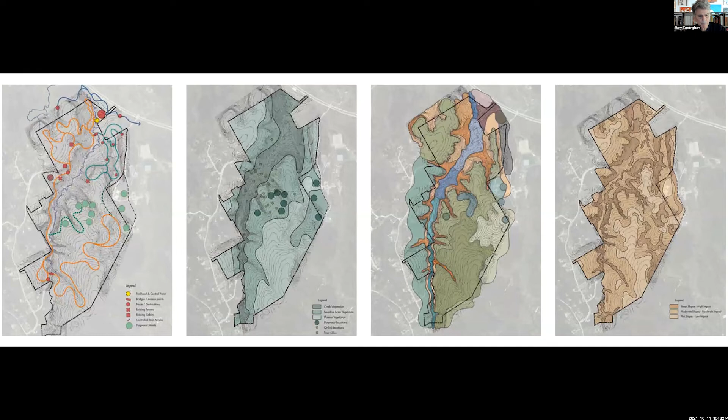Spending time on the site and learning about that was quite wonderful. And the site we had ourselves had its own interesting challenges going on. It was a brownfield, an existing satellite dish installation for AT&T with this massive dish in it.

And we had to go about basically cleaning this thing up. The idea was to put the building on this already disturbed brownfield and not impact the 400 acres of this rather sacred environment. So we proceeded to design a building, and of course, like a lot of projects, it was a very challenging budget.

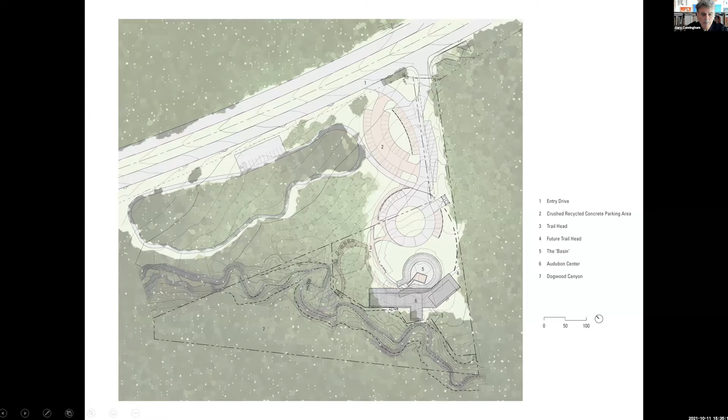And you notice that the building has a very bright white roof, and this is to reflect heat. Because the roof is gently sloped away from the view to the north, nobody can tell it's a white roof unless you're in the air—and of course, the birds that fly around. But this building is a gold LEED building, and so we are also trying to teach the idea of conservation, respect, and sustainability, which is so critical.

Now, what's interesting about the siting of this building is you've got the circle here, which is this dish where the satellite dish sat. And here to the south of the building you have this creek, which floods quite a bit. Here's the building sandwiched in between.

We could not do a traditional foundation where you plant the building into the dirt, because water needs to flow under the building to get to the creek, since the area to the north of the building is higher than the building. So it's going to flow south, under the building, into the creek.

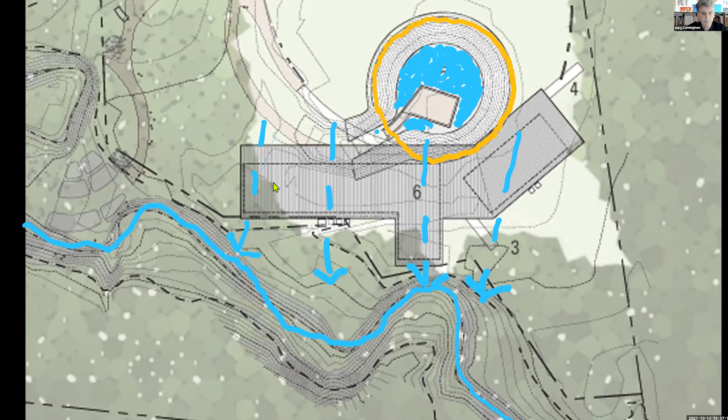In fact, we studied making this a permanent water feature, but our client, Annie Brown, director of Audubon Texas, said, 'How do you intend to keep water in this feature?' Well, we said we'd maybe put a well in, or a windmill or something like that, to pump water into it.

Audubon's attitude is that they do not like drilling holes into the earth, because it's not a cool thing to do, and the amount of evaporation you have when you have an open area of water like this is devastating.

It'll evaporate in a matter of days. So if we were pumping water out, utilizing resources, taking groundwater out of the earth, we would have been doing a disservice to the land and to the site. We were instructed to use it as a teaching tool, not to go with our instinct to make it a beautiful water feature, but to let it be what it is and teach that to visitors.

The way we kept the water flowing underneath the building is we literally lifted the building up off the ground and propped it up. We drilled some piers and used simple steel bar joists to jack the building up. This is the expression of how the building operates with the land. We respect the land, we're light on the land. We did not engage it with the exception of these 18-inch round pier holes.

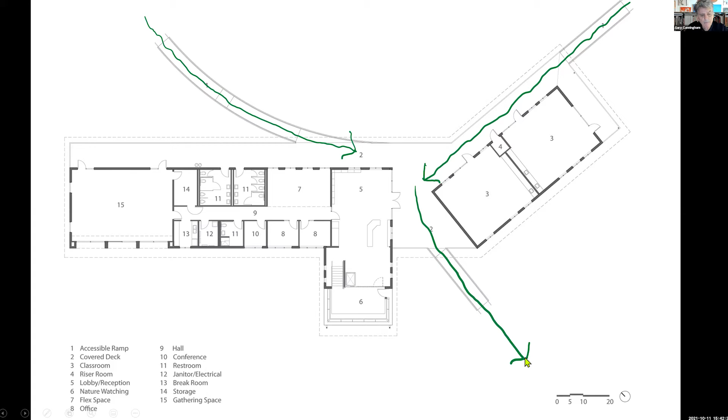The important thing is these roof areas that cantilever past the buildings, and this porch that's formed in between the 2 buildings that really form a portal from the gathering area in front of the building to the north to the actual path to the Dogwood, to the canyon itself.

It's slanted to try to keep the birds from flying into the glass and killing themselves. When you put a window in a forest, it basically makes a mirror. So when a bird takes off and sees that glass, they may see a reflection of a sky. And so they think they're flying into the sky, and they'll slam into that glass and wipe out.

That is not a very positive signal in a nature center to have dead birds sitting around the building. And you'll see later in the last project that there's a new way to do bird safe glass, and we're figuring this stuff out, and so are the people that make glass, and it's becoming an easier way to protect wildlife, because we lose a lot of birds to glass, and it's often downplayed, but something that, again, every little bit really matters.

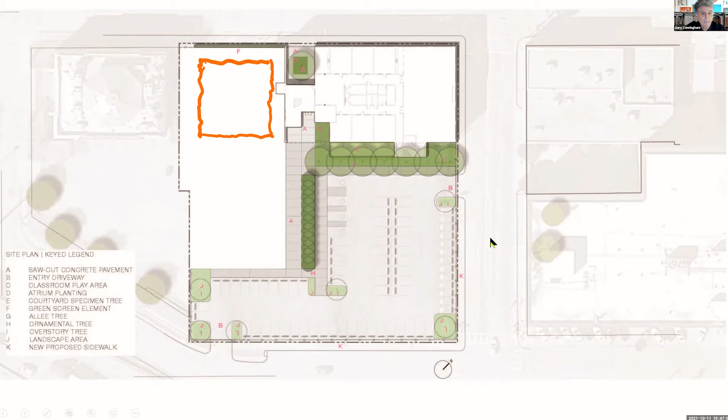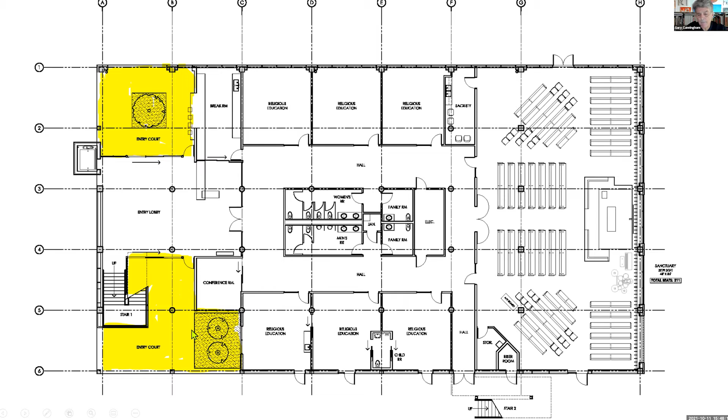And the cool thing is that we had more building than we needed. So in lieu of just simply building out more space, we decided to remove occupiable space and make it exterior space, because we had no porches, we had no outdoor space besides the hot street and the parking lot. So the yellow here indicates areas on the first level where we basically just removed the exterior skin and made it exterior space. And the second level, likewise, a courtyard, an upstairs courtyard, and an upstairs courtyard here. So this kind of became the primary move to introduce nature and light and gathering space for the congregation, which obviously is very critical now.

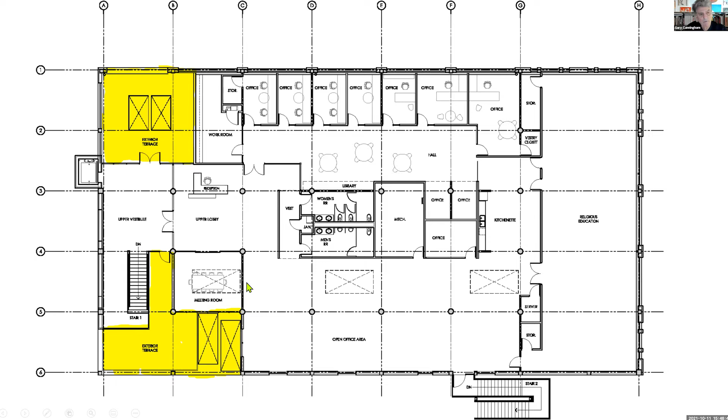And in fact, this project just finished as COVID kicked in, and they began occupying the building probably about 3 or 4 months ago. So they're loving it, they're enjoying it, and they're finding themselves utilizing the outdoor space to greet people and hang out and do stuff.

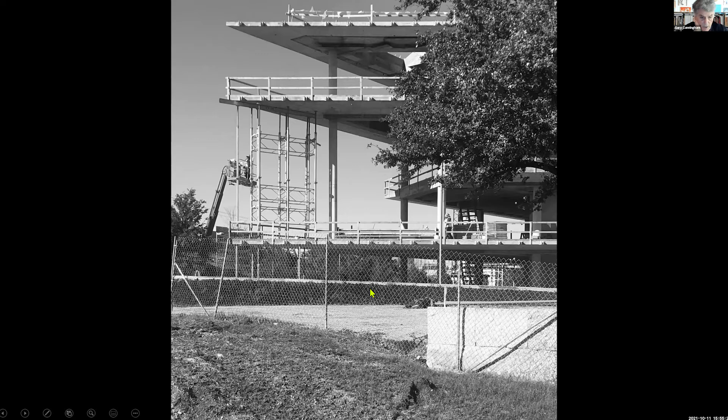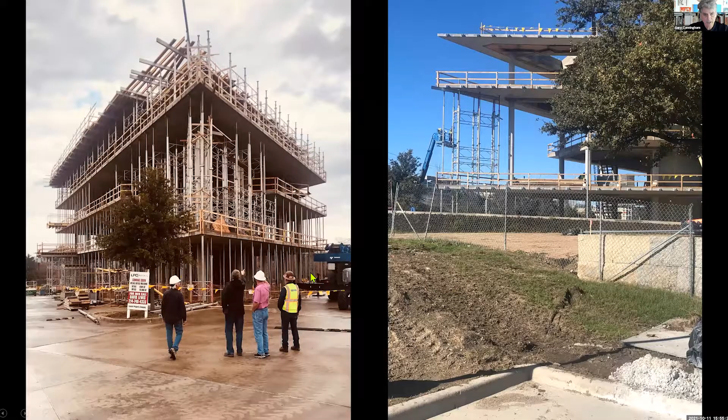This last project is kind of in the suburbs. So we've gone from rural to the edge of an urban condition, to a suburb that's actually trying to introduce an urban condition, with this funky office building and retail site for our client, Half Price Books. They've been our client since the mid 1990s. They're basically a bunch of hippies that go about doing things in a very interesting way, and we just really get along. They're pretty nutty people, but I love them.

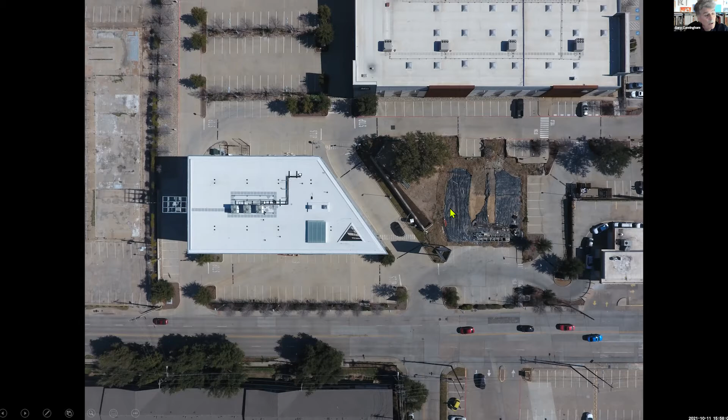The building started construction almost 9 or 10 months before COVID hit. When COVID kicked in, we had to shut it down because Half Price had to save every penny for salaries and payroll. So we shut the job down, and Half Price managed to pay all of its employees, not lay anyone off during that period. They stayed healthy, so we kicked the project back in — it'll be a year next month. It's been a very, very difficult reboot, with a lot of challenges with subcontractors. I think we're on our 5th steel erector right now. So we're going to get there, but it's challenging.

What makes this building rather interesting, and I think very relevant to today's talk, comes from our client, Boots — that's her nickname, her name is Sharon. She kept talking about wanting to do a roof garden with trees, and we'd say, Boots, we can't afford to put trees and a roof garden on this building because we'd have to add an elevator stop, stairways, and support all that weight of landscape up there. It's just not in the cards for the budget. But she kept pushing us on this and repeating herself.

We finally got the message, and realized we could design a building that is basically an area of enclosed, purposeful space — in this case three levels of office or retail above first-level retail — but put the stairways, one stair, a second stair, and the elevators outside, making the lobby of this building an exterior lobby. Don't enclose it, don't air condition it, and give us some outdoor space to hang out and mill around. That's what we did. Again, Boots kept telling us she wanted to be able to be outside, to have events and have people hang out up there.

And of course it was a smart move economically because we're not air conditioning all that space, but it really became a fun project to take this idea and join the two sites, where when you're on the 2nd, 3rd, or 4th level, you're looking back to the south to the restaurant roof and this outdoor garden that's really formed by this amazing live oak tree that we saved and kept.

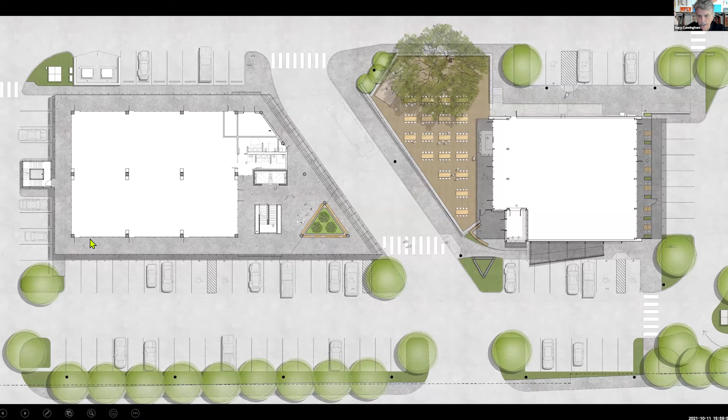You can see the gray outside space — it wraps around the floor plate. Looking at the 4th floor, this is the enclosed office space, and this is a 10-foot wide walk-around. So you may take an elevator up to the fourth floor and walk around to find the front door of the office you're visiting outside around the corner, or you may enter here and go internally. You may walk back around and go to the bathroom, into a vestibule, or you may come up for an event and have a glass of wine and sit outside the whole time.

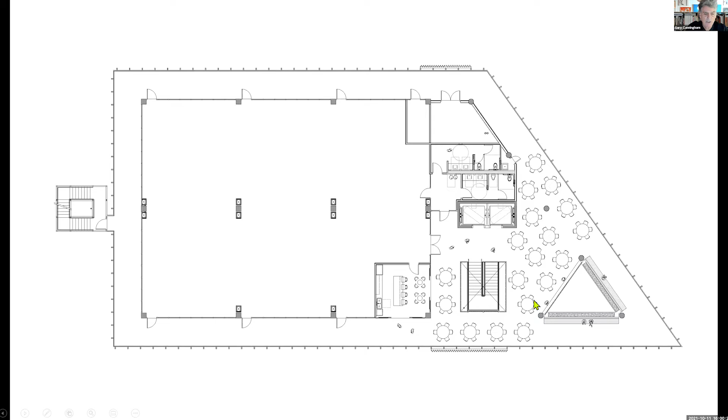There's benches right here. We're going to plant some trees on the second floor in a large planter well, but we see this outdoor space being used a lot.

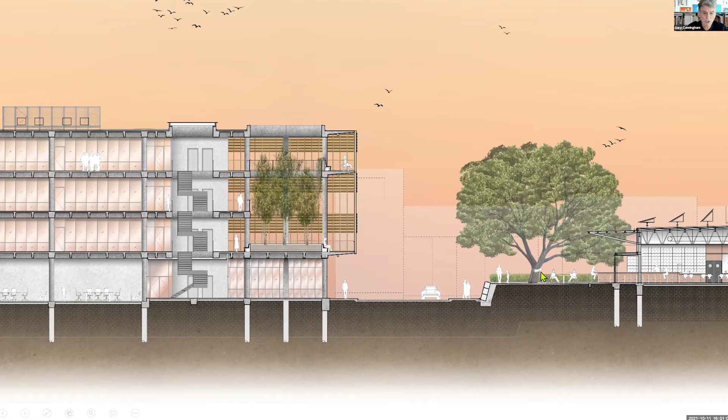And here we are looking into the beer garden of the restaurant, with this large, beautiful tree. Even the way this roof is being designed for the restaurant, we thought about the view of it from the office building looking down. So we've got basically snow fencing up there to block the air conditioning units and give some interesting action going on the roof of this restaurant.

This is an outdoor dining space. In fact, there's been several restaurants that wanted to rent the space and offered to take it, but they wanted to enclose this out here. We just told our client, nope, don't do that. And they listened to us and said, no, we're not going to enclose that, we're not going to increase the square footage. The outdoor space is important as a breathing space between the restaurant and the office building. So we're now working with someone that wants to keep this outdoor space the way it is, keep it intact, and keep that break area between the building and the restaurant.

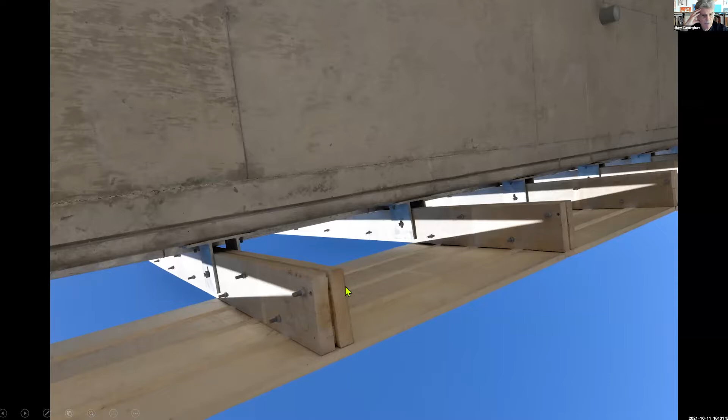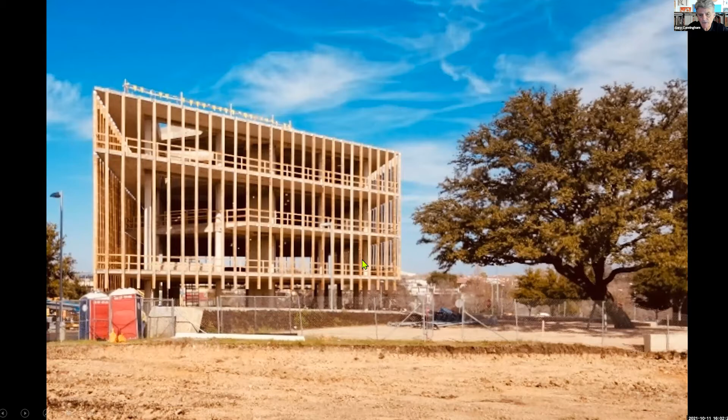This building is very interesting. It's basically this concrete box, stacked plates, that we bolted stainless steel anchors onto, and we basically bolted 2x8s, sometimes with steel in between, to them, building this kind of veil around the building. You can see the stacks of the floor plates, and then these sticks of wood going up and down, literally guys up there with drills, in a lift, screwing this wood onto the 2x8s.

The wood hasn't been planed or finished. It's raw and kind of fuzzy. Those stripes you see came from the banding during the process of acetylation, when they put it into a kiln and vacuum out and inject vinegar to take all the edible meat out of the wood itself.

But the technology is guys with drills. We can take the stuff down and move it around. This building may morph over the next 20 years into who knows what. It may end up being a ghetto with floor levels of stuff hanging on. That's fine with me.

This is the wood several years later, and you can see some of the strap marks, and it's got a nice rough texture to it. We saved money by buying this wood and not having it planed. Often when you buy wood, you've got to surface it on 1, 2, 3, or 4 sides. This wood is a full 1 1/8 inch thick by 8 1/8 wide. It would have been milled down to 7.5 by 3/4. We've got an extra 3/8 thickness and almost an extra inch of size, plus this nice rough surface from the sawmill back in the forest.

So again, this is focused on budget. To finish the wood would have cost more money than we could have afforded. Frankly, the gnarliness of this wood really lends itself to the building and the attitude and approach we took to skinning and shading the building from the sun.

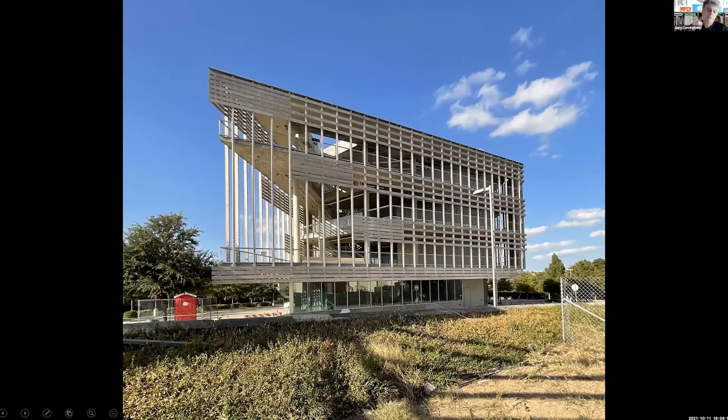So you've got this stacked box, and you've got 4 sides of elevation, and the elevations reflect the solar orientation of the building. This is the south wall, south elevation, and you can see reasonable shading on it—very little sun reaching the building beyond at this time of day. Although at the corner we break away to bring in a lot of light where a tree is going to get planted right here.

The west side turns the corner, and you can see it's dense right there. As you move around from the south to the east, you can see the east has no horizontal slats at all—well, we couldn't afford them, and the wood's pretty expensive.

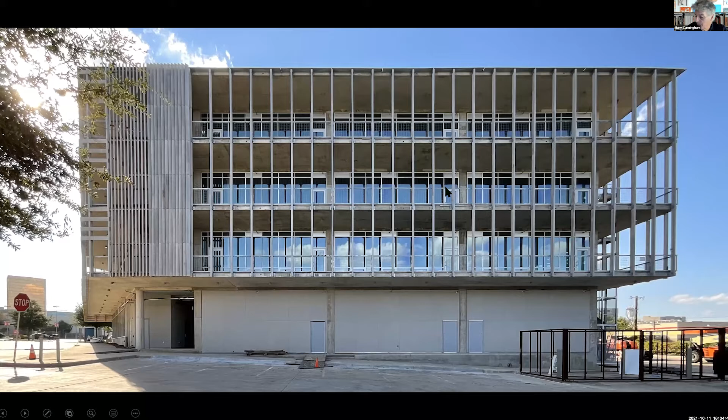So we researched this—recall a few minutes ago I talked about sloped glass in the Dogwood Center to keep birds from flying into windows. Well here, the glazing on the east and north is glass with white lines etched in it every 4 inches. The birds see those lines and won't fly into it, because you can see the beautiful cloud reflected right there. If a bird is sitting on this rail, it would want to fly into that window to get out, and we would probably kill it.

So again, the cost of this glass was less expensive than the wood slat screen. We wanted the wood screen, but this was the right move because it's what we could afford. You let the budget drive you—you have to at times, and you've got to be flexible and open-minded. The purpose here was not to kill birds and keep the project on budget, but also to show that the building has 4 sides with 4 different responses to the climate, trying to coexist with nature that's around us.

This is the north elevation. You can see the same glazing happening over here. This is one of the stair towers, finally getting clad in expanded metal lath. Again, both stairways are exterior to save money.

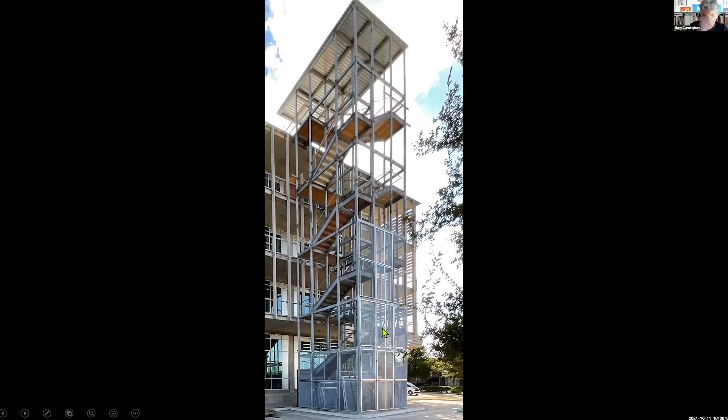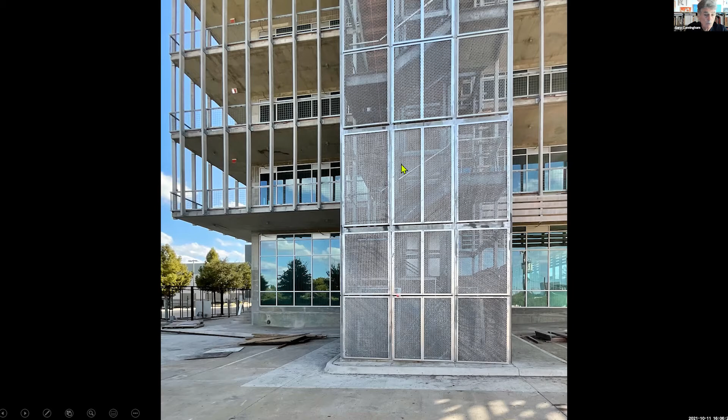This one goes to the roof for maintenance. This is very cost-effective—expanded metal lath welded to simple metal angle frames, then either zinc dipped or hot dip galvanized. All the metal on the job is galvanized. The idea is not to have to paint it; if we do paint it, we'll start with galvanized paint down the road. The idea is to have no maintenance, and we also like the color palette it gives the building.

Turning the corner from north to west, you can see how dense the shading becomes. The lowest element turns the corner because that's a sign band where people put signage for the retail center. The west has, without a doubt, the most shading—very little sun gets in there. This increased vertical shading is at the elevator lobbies, a more unique situation, and the screen cuts back at the corner to let in light for the trees that are going to get planted right there.

This is the walkway on the west. There's a glass storefront of the office building, and that's the west sun. Right now it's probably about 1:30, 2 o'clock, and the sun is well protected. Come 5, 6, you'll start getting some light filtered in, but by then the offices are pretty much shut down.

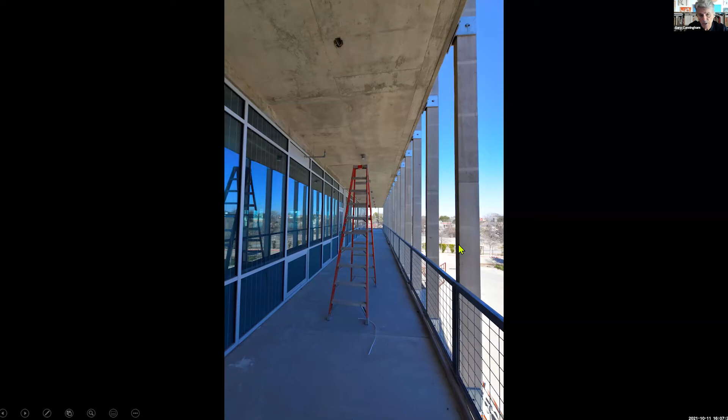The northeast side, you can see this is in the afternoon as well. No sun's reaching it, and by the time it turns a corner to the south, this thing's pretty much in shade. But the idea is you're walking around outside to get to your space, promoting people getting outside and getting some fresh air.

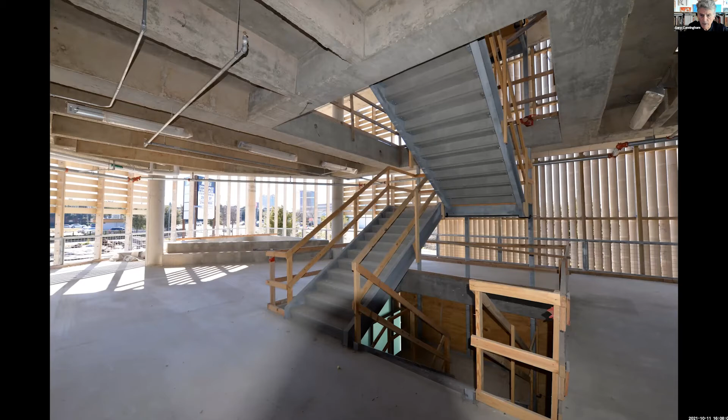Here we are at the stairwell, looking back to the southwest, and that's the planter that's going to receive about 5 river birch trees, and that's a bench right there. You can see fire protection sprinklers, heaters, lights.

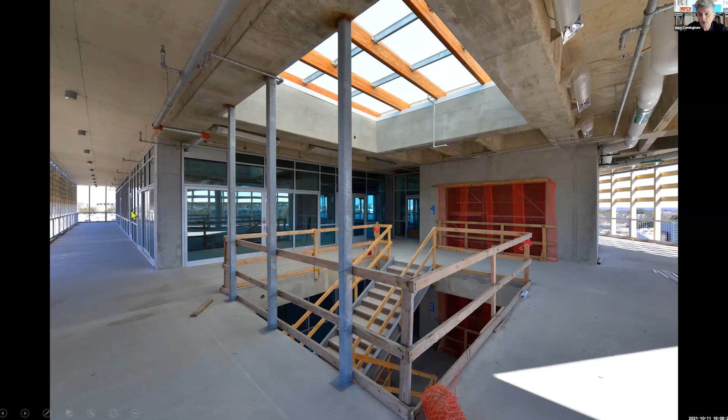This is a functioning lobby for year-round use. There's the elevator doors on the outside, there's the office right there. Again, exterior sprinklers. That's the walkway on the west side. And there's the entrance to the bathrooms, vestibule.

Looking back to the corner, there's the west, that's the south. See the sun filtering in here, but it really doesn't quite reach the wall, does it? A really fun corner. Interesting view.

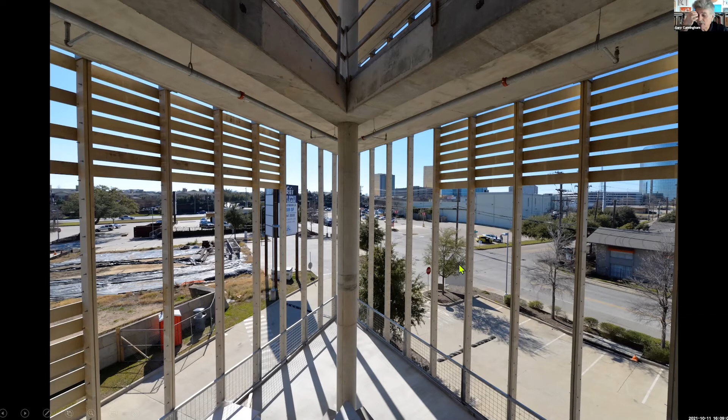When you do a project like this, and this was not a very big project, I'd say it's about $10 million, we had to engage a concrete subcontractor to do the concrete frame. It's hard to find a small concrete subcontractor that does this sort of thing, so we had to go with a big guy. They are so busy and so big that they really didn't want to talk to us.

They said, we're just going to do it, you get what you get. We asked, what kind of forms do we get? Well, you're going to get caliber grade D forms. Grade D means it's probably 30, 40 years old sheet metal. It's going to be beat up, going to have lots of challenges and problems. You look at some of these pans and they're just beat to heck. But that's what the budget could afford.

So we had to embrace this approach and accept that as kind of a rough aesthetic. It certainly ties nicely into the wood and that kind of approach there. But you don't get to choose what you get to use a lot of the time. Economics drive a lot of what we do. We're a small firm, we don't have large budget projects. This client is unique in that they do invest in their buildings, and probably invest a little bit more than the speculative clients because they're not going to sell this, they're going to keep it.

Because this will become an income stream for them 20, 30 years from now. But still, it's a very challenging project budget-wise, and you've got to be fluid, open-minded, and you can't be a big baby about what you're going to get or not get. You just got to go with the flow and accept it and be comfortable with that. And you better be good at it. It's just the way things are. In fact, it really informs us in how we do our work. Without these kinds of parameters and challenges, I think we wouldn't have to work very hard to come to what we're trying to get done. And it is hard work.

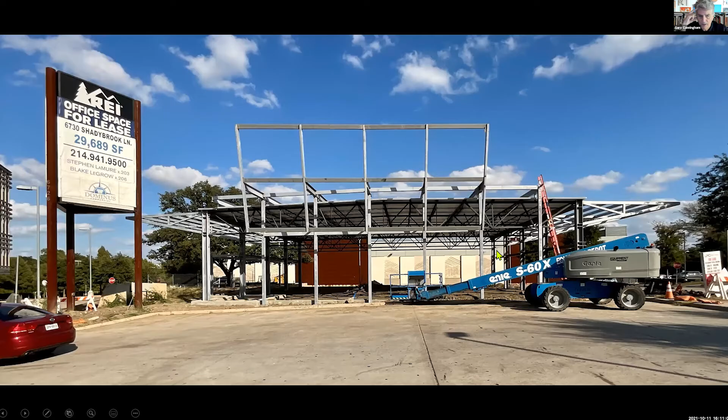Here's a restaurant, finally sealed up and under construction, and this will be covered in similar wood slats. It'll be a nice big open porch out toward the outdoor area.

It was Eric who really came up with this great idea of carving the building away and repurposing the building frame for exterior space and outdoor porches. Michael is the guy that did the project you're looking at right now, Shadybrook. It was Michael who pressed the idea of bringing the circulation elements outside to save money, reduce square footage of conditioned space, which also helped us tremendously on parking counts. This site is driven by parking. The building is shoved right against the parking lot, but it kind of works with the urbanity and density of it.